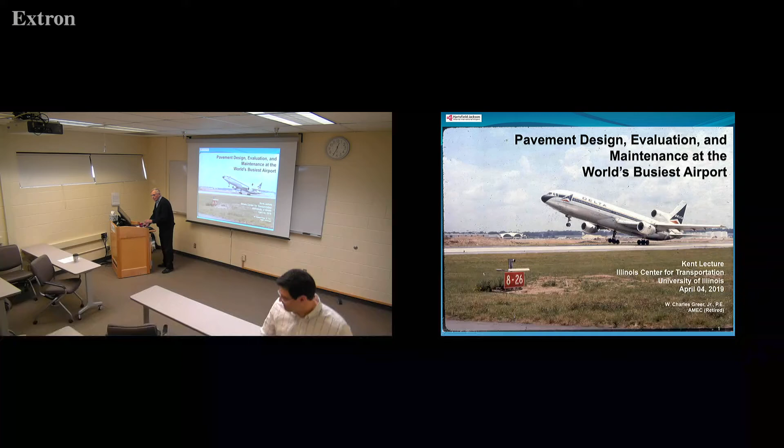Okay. Everybody here okay? Okay, good. I'd like to thank Hassan and Ahmad and the Center for letting me come chat with you today and share some experiences I've had over my career.

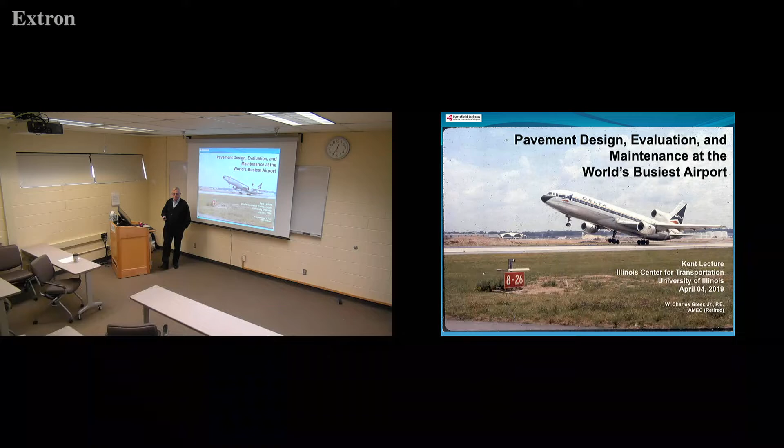We're going to talk about the world's busiest airport, and we'll explain what that means in a minute here. But I've had the opportunity to work on this project for over 40 years, off and on. I wasn't an employee of the airport, but I was consultant to the airport on just a whole host of projects there over the years. And so we look at Hartsfield.

It's the busiest airport in the world, and until last year it had more than 107 million passengers pass through there. And I remember when we opened what's called Midfield in 1980, it was a big deal because that was going to handle 55 million passengers. And now we're at almost double that. Some things have been added, obviously, to allow that. But sometimes your estimates of capacity are too low on things.

Beijing is fast coming up, though. It will probably overtake Hartsfield in the next 3 or 4 or 5 years. But right now, Hartsfield's the busiest in passengers. And until last year, it was also the busiest in operations, an operation being a landing or a takeoff. O'Hare passed it last year, and in the past years, O'Hare and Atlanta kind of go back and forth, who's the busiest.

But Atlanta was a few thousand less, 895,000. But it's interesting to note, in 2007, Hartsfield was just shy of 1 million operations in a year. And then along came the Great Recession, as everybody calls it, and the number of operations has come down as airlines have shrunk operations. But if you've been on a plane lately, you know where they all went. Everybody's filled every seat. So anyway, just to give a flavor for busiest in passengers and has been busiest in operations a number of the last years.

What's the history of Hartsfield? Well, in the beginning, it was pretty small. And it's kind of interesting. There was an article, in fact, I'll pull it out here, in the Atlanta newspaper just in the last week, 100 years ago, on March 31st, 1919. This article appeared in the paper, and I'll read it just quickly, it's fairly short.

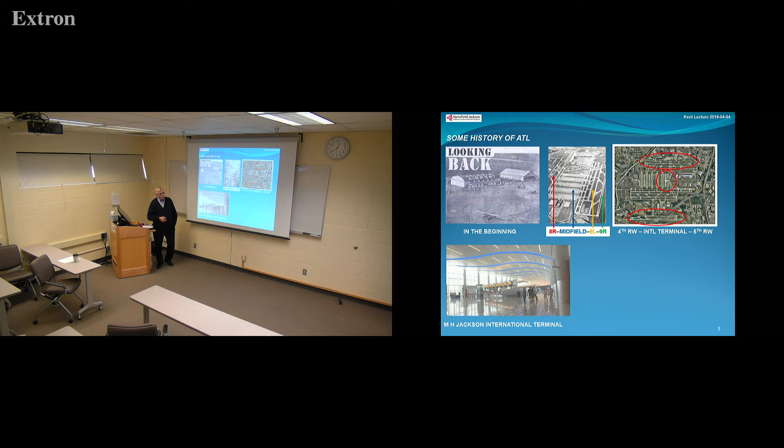As we move ahead, in 2011, the Maynard-Jackson International Terminal was built. It added 9 gates to the airport, and it cost a mere $1.2 billion, a little bit more than they planned on. Midfield, which was built in the 70s, cost $400 million, and that included the terminals, the pavements, everything. So a little bit different.

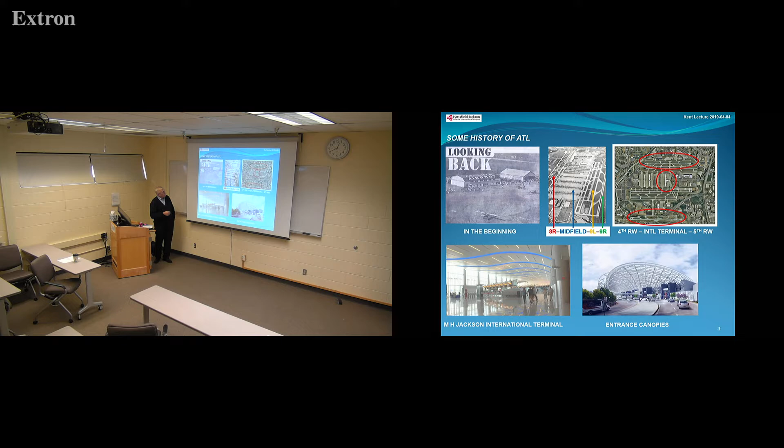Now if you go down to Hartsfield and you drive in, you'll see these nice big sweeping canopies that are being constructed to give it an even more modern look to this 40-year-old airport. So that's a little bit of the history. And the good thing about the canopies, which I think are about $260 million, is they are now finally building elevated pedestrian walkways. So after 40 years, you no longer have to dodge the cars. You'll be able to go up the escalator, cross, and get out of traffic. So it's come a long way from 100 years ago to where it is today.

Now, you got to have efficient operations, because if you shut down a Hartsfield runway or taxiway, you mess up the whole country. It's like coming up here yesterday, coming through Nashville. Everything was going fine. Sarah looked at the map. Hey, everything's green. But by 10 o'clock when we got to Nashville, it took an hour to get through Nashville, all because one lane on 440 West had been shut down. And you have 24, 40, and 65 all coming together in the middle of town, shut even one lane down, you have major problems. So it took an extra hour.

There's about 47 million square feet of concrete pavement at Hartsfield. That's 1,000 plus acres. You could pave 250 miles of 4-lane interstate, 12 inches thick, or with the 2.4 million cubic yards, we could go out and build a 10,000-foot runway every year for 30 years. So it's a lot of concrete there. In fact, my father-in-law has a farm out at Farmer City, west of here, about 20 miles. I once told him, we could come out here, pave your entire farm, 400 plus acres, 3 feet thick, and we'd still have some concrete left over.

And the replacement value, who knows? We once estimated more than $1 billion. It's probably a couple of billion dollars to replace the concrete out there. So a lot of money, a lot of people count on it. Let's step back approximately 10 years to 2010. When we looked, Hartsfield's distribution of pavements was pretty level by decade. In other words, less than 10 years, about 25%. So 20 to 30% in each 10-year increment, and almost 25% was over 30 years. You know, 20-year designs, 30 years.

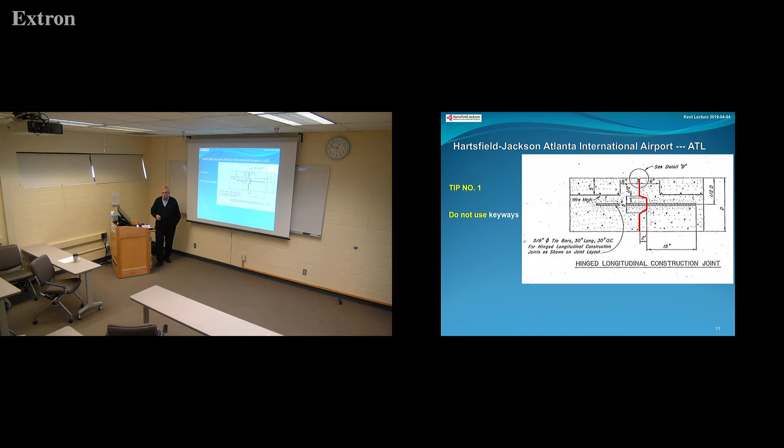And I'm going to diverge on 3 tips to talk about here. Those are kind of design tips for you. But one is, don't use keyways. That's my personal preference. And we'll talk about why they don't work. But you know, you got a nice design keyway here. You see it outlined in red. Looks really great on paper, right? Very nice. But if we take a close look at that, we say, hey, there's a dimension there that's missing.

Now, one might say, well, it looks like the dimension up there, so it must be that. But if you're on the project trying to get this built and arguing with the contractor, he says, hey, there's no dimension there. Whatever I built is okay. So you have to be sure you get everything covered. And the dimension here is missing, down to the top of the keyway. Now you can say, well, looks like that's almost at the level of the temperature steel, but it's not quite.

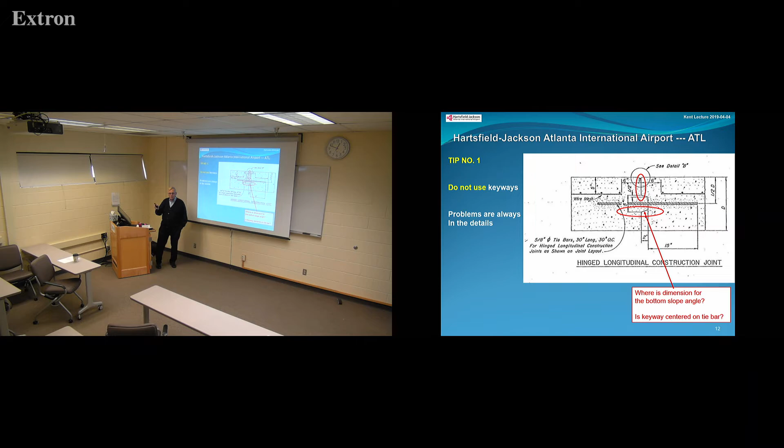So you got to be precise on what you specify. And so the angle, we know here, it's a ½ inch. This is 2 inches. We assume that's 2 inches up above because it looks symmetrical, but maybe it is, maybe it isn't. Okay. Why not use them? They don't work. That's very simple.

Ernie Barenberg, I remember reading one of his reports in the mid-'80s that he had done some work on things. And he said keyways were fine until you need them. So that's kind of how they are. We look here, this is a longitudinal keyway. The female side is on this side, the male side is over here. This is concrete all placed at the same time.

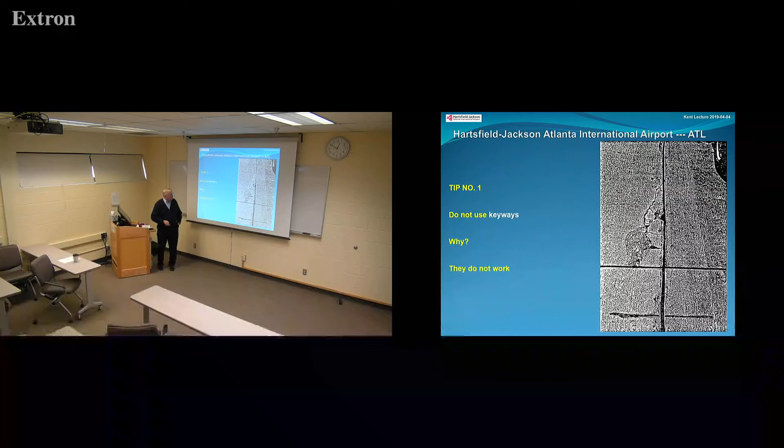So finally I said, let's take an 8-foot long section out of here. So you can see the start mark and the finish mark, about a foot, foot and a half wide. We'll haul that back to the lab and we'll slice it up. And we'll map what this looks like on about 6-inch centers going down through there to see what we find. Well, things that we found, they weren't built the way they were supposed to.

No, maybe you have enough. Maybe you don't have enough steel to hold together. Maybe you don't put steel in. But these are things that you've got to look at. So they don't always get built as designed. Okay. So what do we do?

Well, let's do away with the keyways and let's dowel the slabs all the way around. And we said, we think that might work. But conventional wisdom in the 80s, we were thinking, no, we dowel all the way around the slab, we're going to split it into quarters. We're going to lock it up and crack. Well, 30 years, fortunately, we haven't seen a problem.

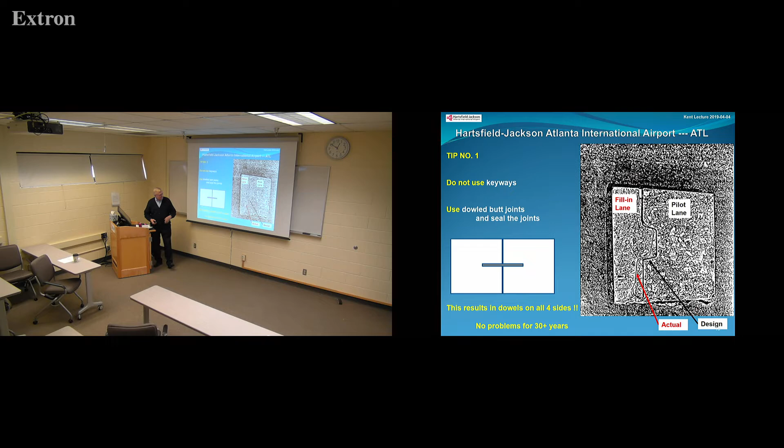So sometimes your worries, you know, maybe you're looking to do something, go off a part of your airport or your highway where you got something that doesn't matter, build something and see if it works. The only problem is, you have 10, 20, 30 years to wait and see if it works or not. You don't always have that, okay?

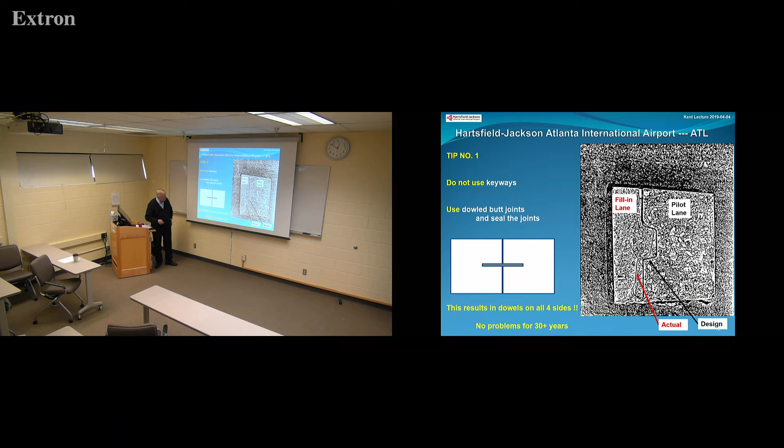Okay, tip number 2, slab sizes. In the 60s and early 70s, Atlanta built for its runways and taxiways joint spacings that were 75 feet long. So 25-foot wide slabs, 75 feet long. Anything wrong with that? Anybody think? Well, slabs cracked at 25 feet. Boom, boom. Almost everywhere you look. Those 75-foot long slabs became 3 25s.

Say, well, let me fix that and I'll make them 50 feet long. And looks good, no cracks. What do you think happened? Back at 25 feet. So, you know, scratch your head and finally you say, hey, I think the concrete's trying to tell me something. If it's 25 feet wide, it probably wants to be 25 feet long. Now that's not in all cases. That's a rule of thumb, but it's a pretty good rule of thumb I've found.

So we went to 25 by 25s on the runways and taxiways and doweled all the way around, except on aprons. Those are a whole different story. And with the runways and taxiways, with this issue, not a problem over the last 30 plus years. So it's worked. And other airports I've been at, Memphis and Charlotte, 25 by 25 has done well. So look at what's working at your airport or your highway and don't just jump on the latest fad, okay? If it works, don't break it.

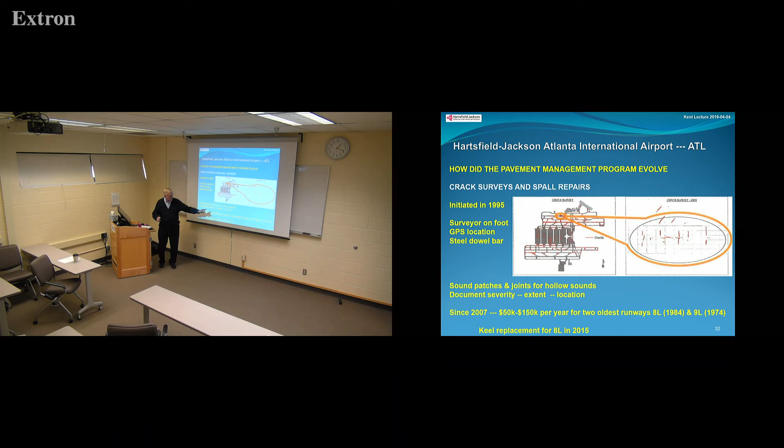And we can back calculate and get a lot of numbers. But you can back calculate a lot of bogus stuff. I see people in their reports putting out, oh, the back calculated modulus is to the nearest 1/10 of a PSI. And I say, are you kidding me? Maybe to the nearest 1,000 PSI, okay? But when I see that, I immediately say, that person doesn't understand the real world. And I kind of write them off, okay?

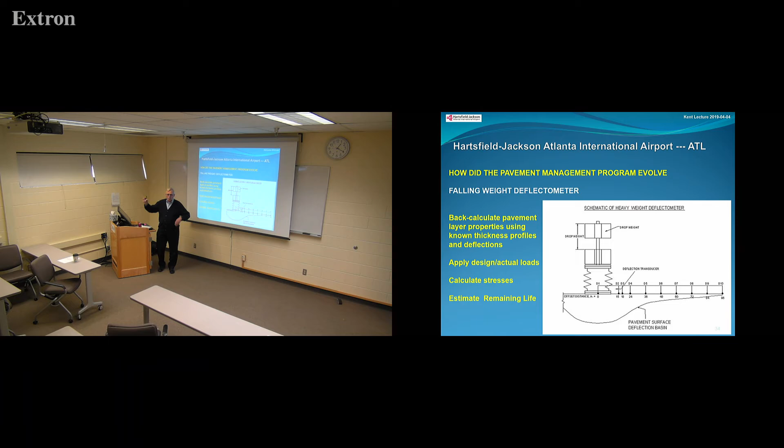So, but you can estimate things, and again, get another number that you're putting with all these different factors in to see what do I think is going on here. Okay, in '94 we started ride quality. Tony Gerardi came in with his equipment. He sets up a laser device, spins around a plane of light. He's got his rolling cart with his sensors on here, and every foot as we go down the wheel path, he gets a reading, and we can then plot the profile by the foot.

You know, should it be 6 inches? Should it be 3 feet? Hey, I don't know. You try it and see what you get. 1 foot seemed to work pretty well. And he had done a lot of this when he was at, I think it's Wright-Patterson up in Ohio, that, you know, how much acceleration, what roughness of pavement makes it too rough that it can black out the pilots. That's where a lot of his stuff came from.

Okay, then we can look at that and see what's the ride quality. This happens to be runway 8 right in 2001 and 2004. And that 2004 study, we're saying, hey, we're beginning to see ride quality drop. It's not precipitous, but it's dropping. That's part of, we think, by 2010, you're going to have a problem.

Okay, coring, boring, sampling, lab testing. I can't say enough about it. Yeah, I come from a testing background, but I was part of helping Marshall on the research project way back when, building his, we called it the Blue Goose, but you know, the pneumatic 4 at a time test for resilient modulus. Get those strength parameters. Now you still have the problem, what do I put into my models? We got great models, but material characterization input, that's still a tough go.

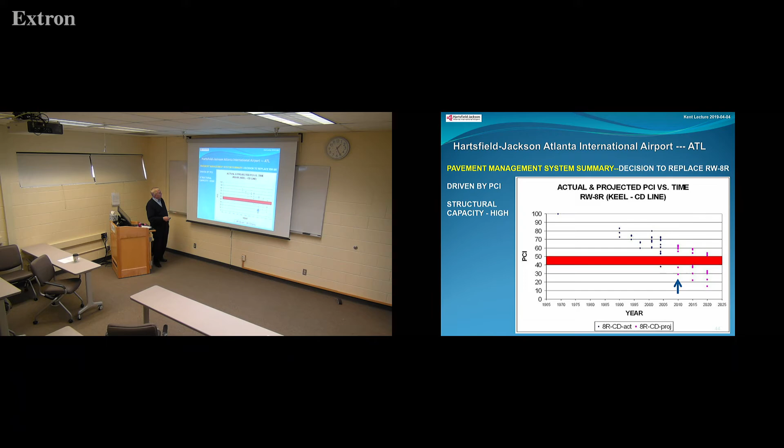So, at the end of the day, what was happening? PCI primarily drove things because we had good structural capacity. We looked at ride quality. And what we did was we put things on a chart, so we kind of see how do those line up. And so we have up here PCI values, and we say, hey, on 8 right, I'm not sure if this is 8 right or not, but anyway, we can look and say, hey, we're knocking on the door of the problem zone with this. So you begin to say, I think I'm beginning to have a problem.

I look at my stiffness modulus, I look at my longitudinal joints, and I say here, I'm knocking on the door of the critical parameter that was established. And my ride quality, same thing here. I'm beginning to get into the mild roughness to the moderate roughness. So that was kind of what we said, okay, we think we'll get to 2010, or we think it'll go through 2009. You ought to be looking at major rehab or replacement in 2010. Not an exact science, okay? So that's how we said.

When would you do it? Well, they said, hey, we want to do it before we get used to 5 runways, okay? They replaced it in 60 days. Interestingly enough, the value for operational delay, the airport valued at $15 to $20 million. I think it's a whole lot higher than that. The airport guys once told me they value delay at the airport at $50 a minute on construction jobs. That's $3,000 an hour. That just doesn't sound high enough to me. I'd be more like $50 a second, maybe.

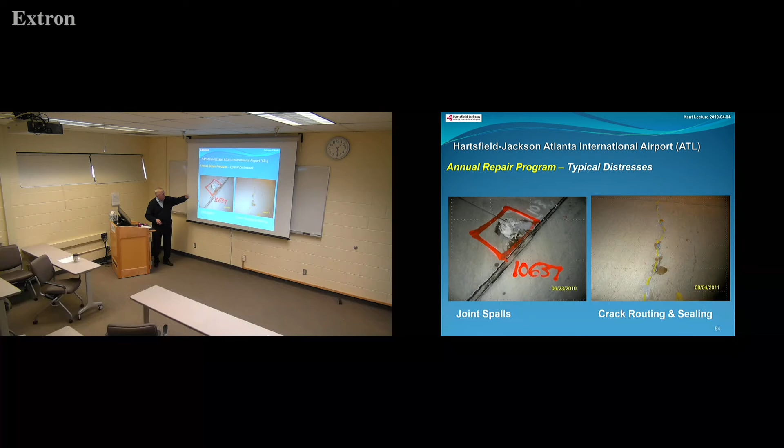These are what some of those look like. These are some joint spalls and some crack routing and sealing. This is that block type repair that I talked about, the special. Frank Hayes was really the guy that developed this, and we worked together with it, but he was the genius behind it. But this is a spall repair at a corner, a joint here, a joint here.

So you cut the concrete here, and you cut it here and remove the bad stuff. Bush hammer down. Everybody knows what a bush hammer is, right? Like a jackhammer, but it's a bush hammer, not a jackhammer. Clean it down to sound concrete, blow it off, clean it dry. Be sure that these joints are sawed smooth. Then drill back at a 45-degree angle into the good concrete.

So this goes down. That bar is epoxied in, and then it goes horizontal as it comes across the patch zone. Then drill vertical bars down into the good concrete, epoxy them in, and use them to mount the interior reinforcing steel to those, so you reinforce the patch, and then use a fibrous concrete when you go back in. High strength, because these are done at night. They've got to be open to traffic 6 o'clock in the morning, so you're looking for a reasonable strength gain in 3 to 4 hours.

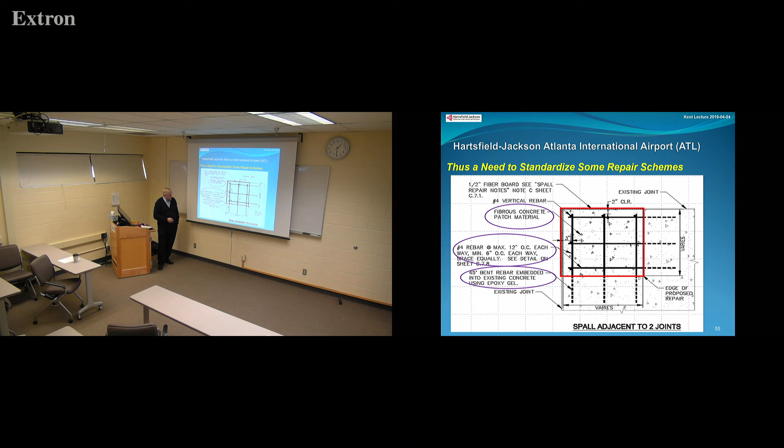Be sure to use fiberboard where you want to maintain your joint. A lot of times I've seen people patch and they put it right up against the other concrete. It bonds and cracks away. So make sure to maintain your joint free, but you can see here, these are the angle bars drilled in, going straight across. These are the vertical bars, and then this is the reinforcing steel. Yes, it costs more than the typical quick slap-some-stuff-on patch, but it lasts a long time.

In fact, coming over this morning, I had a discussion with Jeff. We were talking about how long the patch is supposed to last. Think about that. He might have that as a question on your next test.

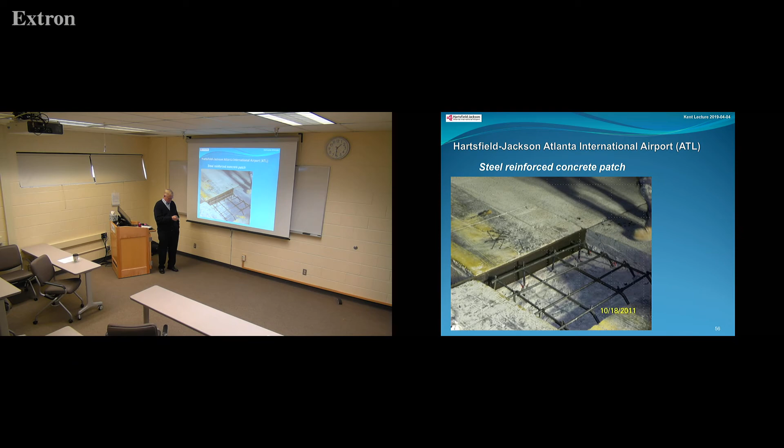Okay. Remember, concrete moves around. Can I go a couple more minutes? Yeah. Okay.

100 feet of concrete pavement will move about 1 inch when I change the temperature 120 degrees. Does the temperature change 120 degrees here in central Illinois? I think so. I think you had some 20 below zero this last winter, and you're going to be 100 this summer. So yeah, you easily get 120. To say nothing of the heat absorbed by the concrete. So put in a normal CTE, coefficient of thermal expansion, and you easily can get maybe 3/4 to an inch. So 25-foot slabs will move 1/4 of an inch. We don't want to seal the joints when I'm doing new construction.

Raise your hand for the season when you would seal the joint on new concrete pavement. Winter? Okay. Spring? Nobody in spring? Okay. Summer? Nobody in summer? Fall? Okay, so I got 2 in winter, 3 or 4 in fall. So nobody in spring, nobody in summer. What's happening in summer? Joints are closed up. So if I seal, come wintertime, boom, they're going to open a lot.

If I do it in the wintertime, the joints are open, and come summertime, they're going to squeeze the stuff out. So I like to do it in the spring or the fall where at least maybe I'm in the middle of the road for thermal movement. Just a thought when you're thinking about that stuff. Concrete never does what you always expect it to do. There's a whole host of factors. I remember Dan was talking about things last week, and all these come into play.

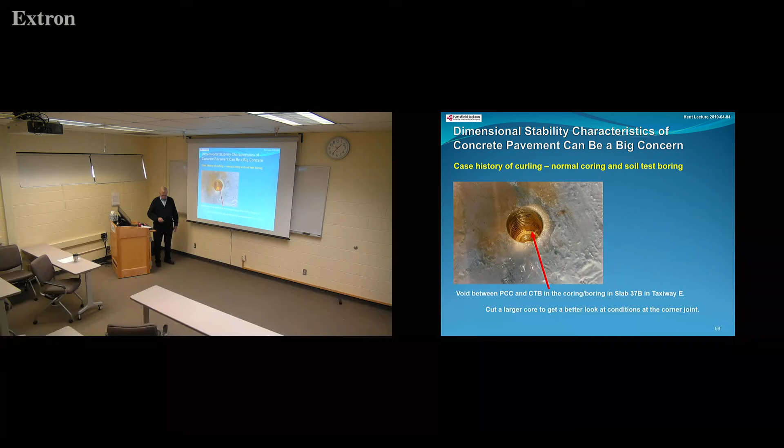And I said, I got to see more of that. How can I do that? Well, I could cut out a big square, but then that gets a little hard to fix. I said to my coring buddy, cut that 26-inch diameter core. So remove the joint sealant and pour epoxy in under gravity flow, because we didn't want to pump anything and disturb something. So we said, we'll lock it in place as it is, and then we cut the big core, and we look under, and lo and behold, this is the longitudinal joint here, so this is a slab that's on the other side. This is the corner that was moving, and look, there's a 3/4 inch void on the other side of the longitudinal joint. No wonder the slab was going up and down, and it just hadn't fatigued yet.

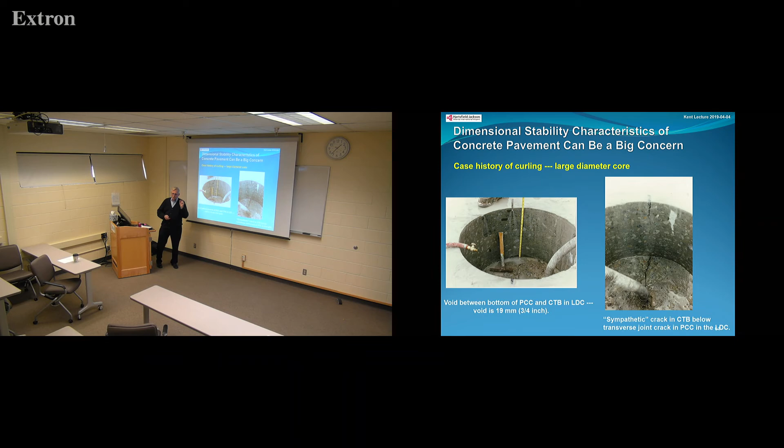And it was, interestingly enough, cracking the CTB right beneath the transverse joint, and my argument is I'm pretty sure the concrete cracked like it was supposed to and took the CTB with it, not vice versa, okay? Because the odds of that CTB cracking there and being right under the joint are pretty small. So what do I do now? So I call up my coring buddy again. He said, hey, I can mount a portable saw on top of that core. It's big enough to do it. So he mounts a portable saw on it. We slice out about a 3 to 4 inch thick slice that's got the dowel bar in it, okay?

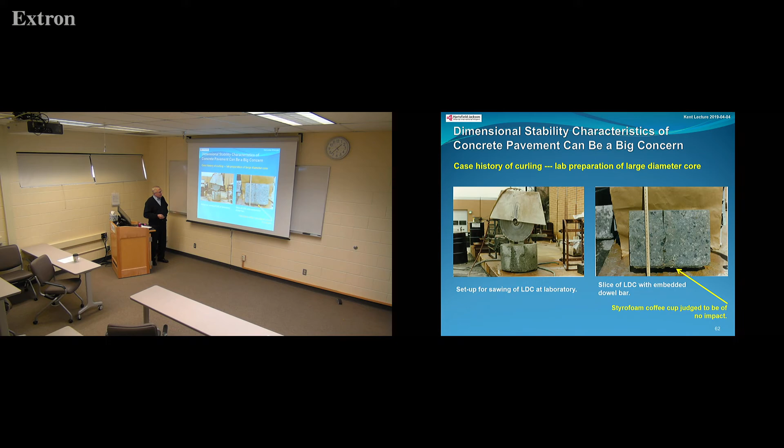And as everything would have it, lo and behold, in one of the cuts, we found a styrofoam coffee cup at the bottom. Now that coffee cup has nothing to do with the problem, but you find things all the time. So I talked to our guys in the NDT department, NDE, and said, hey, let's X-ray this slice I've got. I want to see what that bar looks like. So they played around with the exposure times, and yeah, even here the bar is straight across, but the burn of the radiation makes it look like it's been burned out.

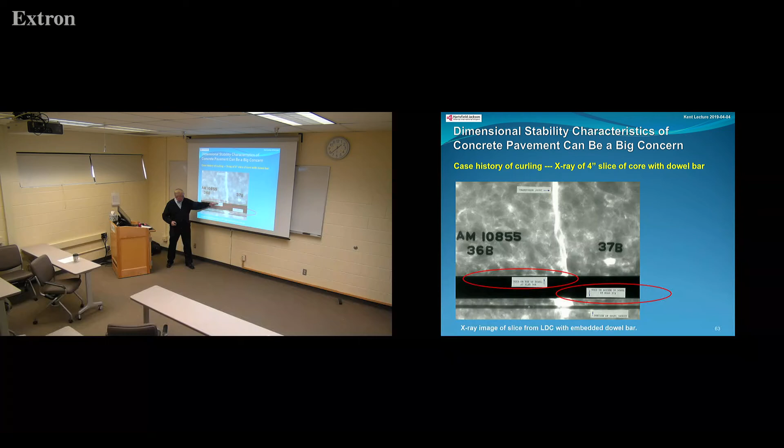But if you look real close, there's a light gray area there and a light gray area right there, which are about 1/16 of an inch voids on top of the dowel on the upstream side, and on the bottom of the dowel on the downstream side. So as this slab pushes down, it pushes this against the concrete and leaves the void behind. Okay?

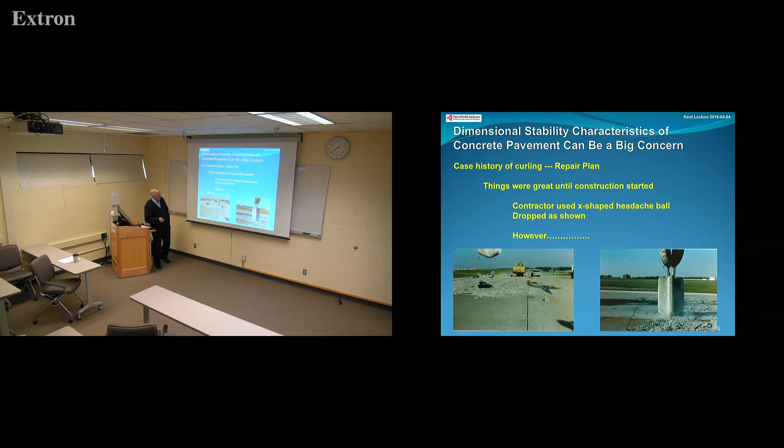So we said, our 12.5, 25, 25, 12.5 would be the replacement. Contractor does that. He beats on it with a headache ball to demolish it. We get a call and say, hey, the slabs we're trying to leave in place, that 12.5, the bottoms of them are all broken out. The contractor said, hey, it's vibration. So we come out, we measure some vibration, and it's well below 2 inches per second. So we say it's not vibration.

And so what was happening was, he was getting so close to the saw cut that the concrete bulks when you break it, and as it's being pushed down, it's just shearing the bottom off of that slab. So we said, cut another foot out and keep that headache ball at least 2 feet away from the joint. Problem went away. But now we have two 26-foot wide slabs, not two 25s, okay?

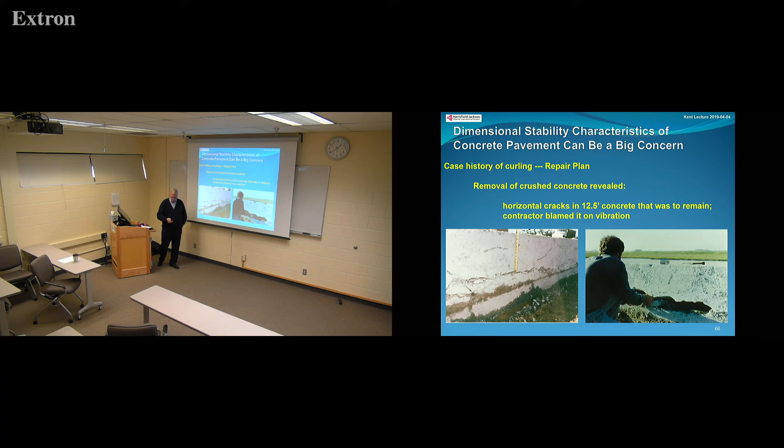And one of the things, well, full depth replacement, 22 inches of concrete, because we got to take out CTB. So, well, gee, I don't want to put CTB back in this. It's about 1,200 feet long. Let's just put in 22 inches of concrete, one operation, boom, we're done.

And to try to compact CTB in there would have been very difficult. How do you get up to the edges? Looks nice and neat on paper, but go out in the field and see how close they can get that roller to that concrete. They don't get it quite there, especially when you're not looking. PCI, even in 2014, was still 66, okay?

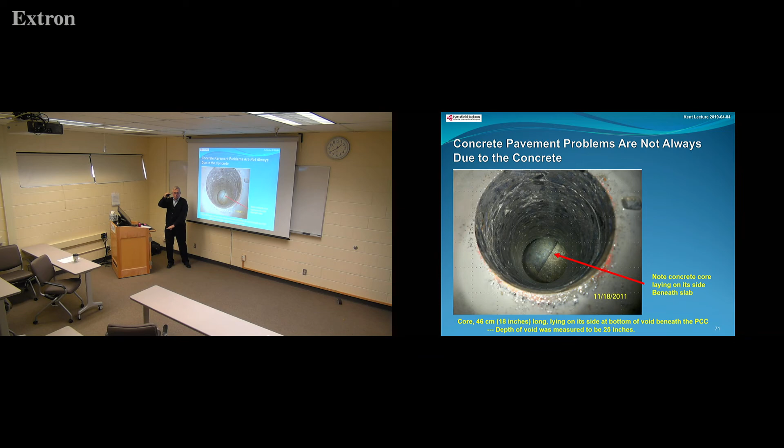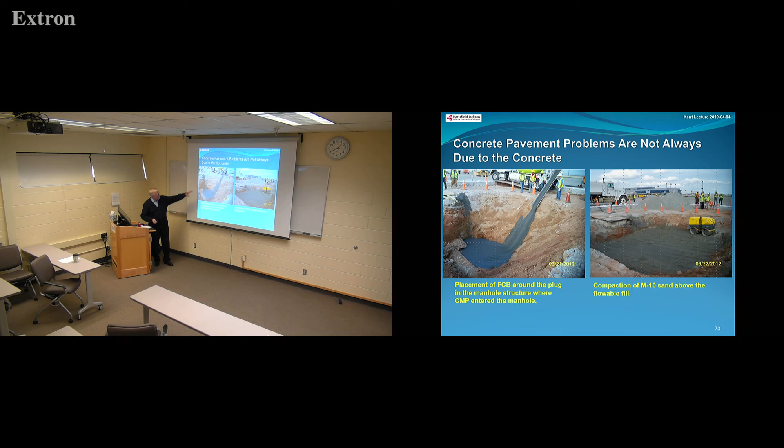So come back, take it out full depth, that's what some of it looked like. One, plug that pipe off so you quit losing soil in it, put in a flowable fill, get it up close, compact in sand screenings, and put it together.